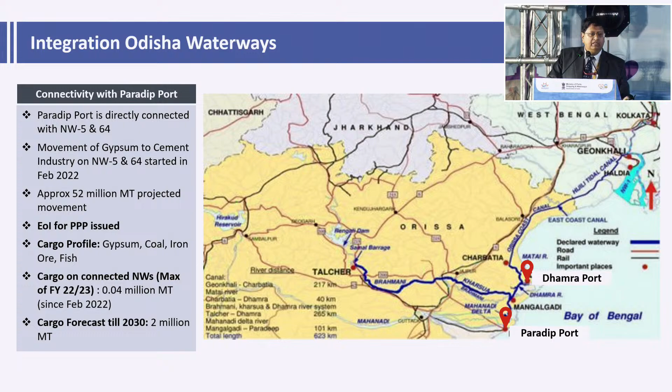And we are developing this project in PPP mode. The Cochin port is integrated with the waterways of Kerala, and we are trying to increase the cargo so that connectivity to the Cochin port gets maximum use of the cheapest mode of transport.

The new Mangalore port is also connected through waterways. The state of Karnataka has shown interest in connecting these waterways to the Mangalore port, and we are trying to develop this region.

Goa is connected through 3 waterways, Zuari and Mandovi, and a connecting waterway, which we are trying to develop for cargo as well as passenger transport and tourism.

The Maharashtra waterways give almost 50% of the cargo on the waterways. So the port of Mumbai and JNPT are connected through the river systems. Jaigarh port and other ports are also connected through the river system.

And we have taken up projects to develop this. Tenders for development of the Amba river and the Vashishti rivers are on. A few more will be invited and published soon for development.

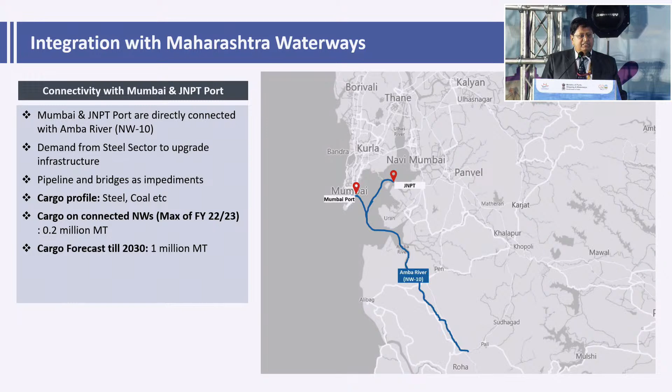There is another concept of connecting different ports through the coastal route, which otherwise, if we travel through land, takes 5 times the time and around 3-4 times the distance. So waterway is the cheapest mode, like Hazira and Ghoga, Mumbai and Ghoga.

Hazira-Ghoga is already connected through a ferry, and cargo of course goes there. But Mumbai-Hazira is also being planned through a Ro-Ro ferry.

So for the way forward, the government has taken several steps to promote coastal shipping and inland waterways. These are policy initiatives, the soft part of the policies, that is relaxing the licenses for coastal operations, promoting RoPax, Ro-Ro, giving priority berthing to coastal vessels and Ro-Ro, discounts for port charges, assistance in construction of coastal berths, and reduction of GST for bunkering.

So with this, I call upon the speakers to highlight their initiatives, and specifically Bangladesh has done good work in inland water transport and coastal shipping. May I request Mr. Khalid Mahmud Chowdhury, Honorable Minister of State, Independent Charge, Government of Bangladesh, to give his special address, please.

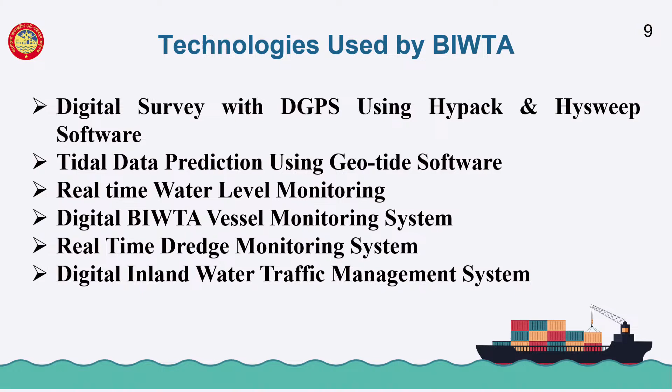And digital inland water traffic management system is in the pilot phasing. It will have many features included in it, like electronic ticketing, online registration, and the civil vessel tracking and monitoring system, etc.

Involvement of private stakeholders is very important to revive, and the diversification of cargo is also important. We are only handling a very limited number of cargo. Though our trade is very huge, we can diversify the cargoes.

Best business practices to be established, and we can also work to have common navigational facilities like AIS, so that the vessels plying in the IBP route have a common AIS system which they can use both in Bangladesh water and Indian water. Ladies and gentlemen, I am at the end of my presentation.

I just want to conclude saying that in terms of regional cooperation, there are very few countries in Asia which have such level of cooperation and integration using the river routes. I hope that it will continue on our path of success. Thank you, ladies and gentlemen, for patient hearing.

Thank you, Commodore Arif Mustafa.

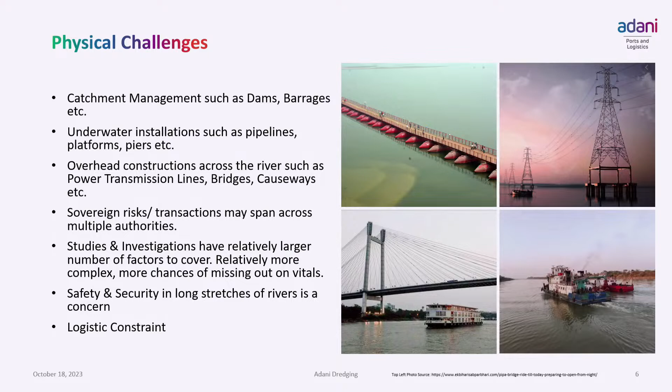The third and most important was the physical challenge, because there were frequent interferences - either underwater installations such as pipelines, or as you can see, the floating pontoon bridge overhanging. These are the physical challenges we faced, and we slowly learned how to meet and mitigate those things.

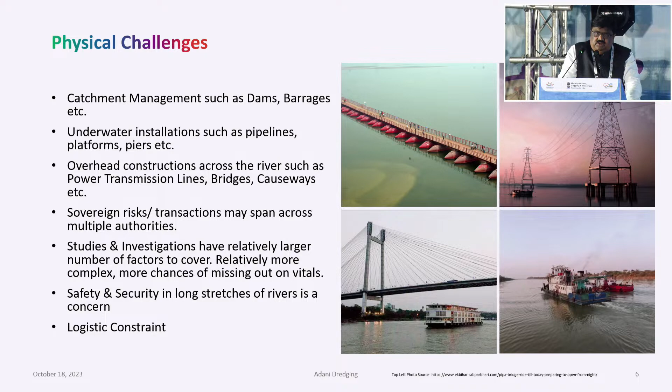How we approached it: we deployed cutter suction dredgers and water injection dredgers, and the real challenge was that constant surveys had to be done on a weekly basis to know the flow of water and how the morphology is behaving. We took all this into consideration and delivered what we had to.

Yeah, you can see that our first year was really challenging, especially during the lean season when we started, because there was a sudden drop in water level. So we tried to understand how we could mitigate that. We started using local support to understand from the locals the best way to streamline the river flow and achieve what we were looking for.

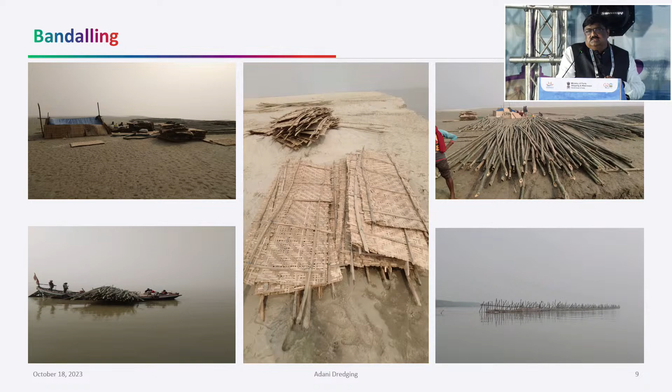Bandalling is one of the best options we found there. I think this is really streamlining the river and giving us the best results.

One of the things we did, when we entered there, was think about the best equipment we could deploy. We introduced some innovations like the extended pontoon and the angle of the cutter, to understand how we could deliver about 45-meter width and 3-meter depth throughout the year.

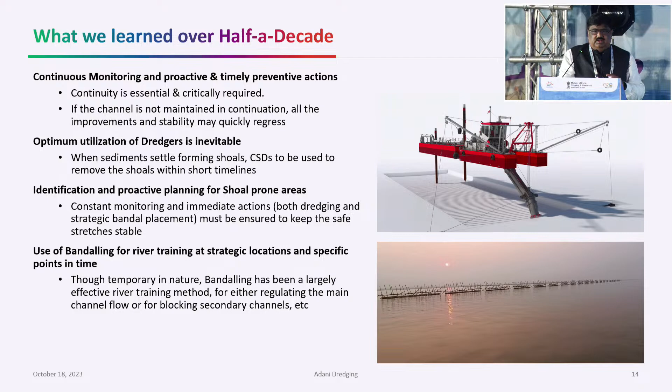Now just a few points on the sustainability of the waterway. We talked about the measures we have to take, constructing groins, dikes, etc., just to streamline the flow so that we can have minimum dredging to be done, and a long-term approach to be taken.

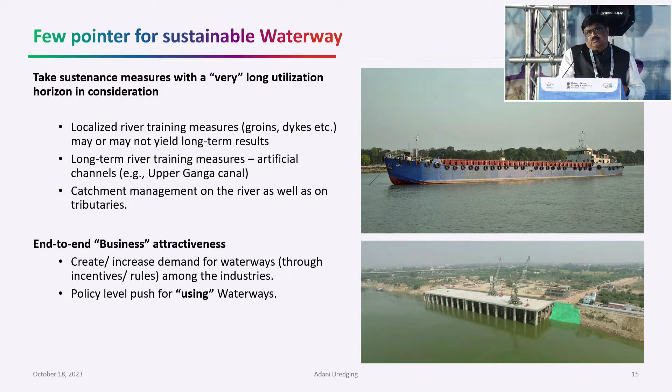And for the business side, as discussed in the presentation, we talked about using policy levels, giving some incentives so that more and more people can come and do their business in the waterways.

So in a nutshell, we have to work with the rivers, not against them. That's the way we are doing it there. Thank you, thank you very much.

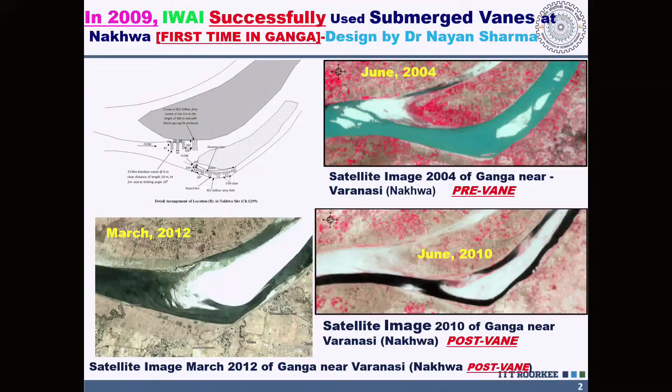Well, in 2009, for the first time, IWAI applied this submerged vane technique. Submerged vane is also dredging, but there is a difference. In mechanical dredging, suction cutter dredging, the river is forced and the sediment gets redeposited. Not only that, the ecosystem, mainly the food chain and habitat, are destroyed. That's a fact. Whereas in submerged vane, we try to induce the river to do dredging spontaneously.

So our experience since 2009, which I visited only two years back, shows that without any dredging, without any bandalling, the water depth is maintained. Prior to this, the water depth was only 1.3 meters, and when we visited two years back, we could still get 3 meters plus.

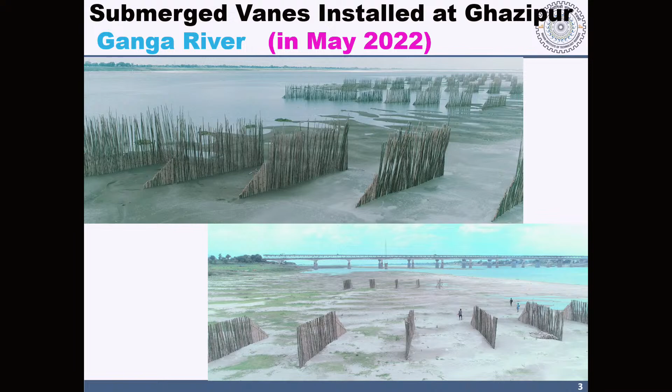Since 2010, almost 12 years, there were some reasons IWAI didn't pursue this very promising technique. But I must give credit to the present chairman. After he came on the scene two years back, the matter got reopened, and for the second time, IIT Roorkee got a chance to use this technique.

In the United States, they use steel plates as submerged vanes, and also concrete slabs. In Europe, they use mostly steel plate and concrete slab. But it's unaffordable because Indian rivers are not like the Mississippi or the Rhine. Ganga, Brahmaputra, Gandak, Kosi are very tough rivers.

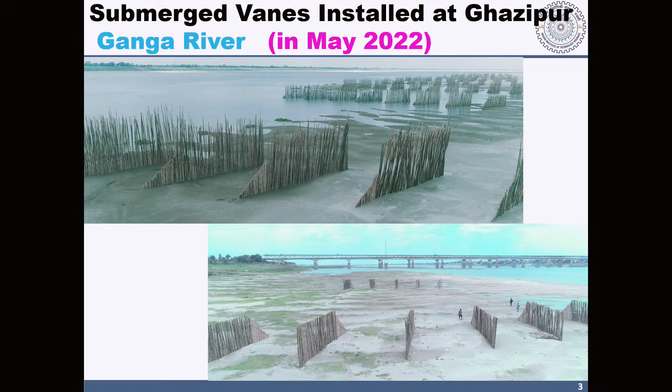Even though I worked on this quite a long time, I was in two minds whether it would succeed or not. But we are very fortunate, we applied the submerged vane technique at 7 sites. The one you are looking at is from last year at Ghazipur. This was during installation. We should try to evaluate what the results are.

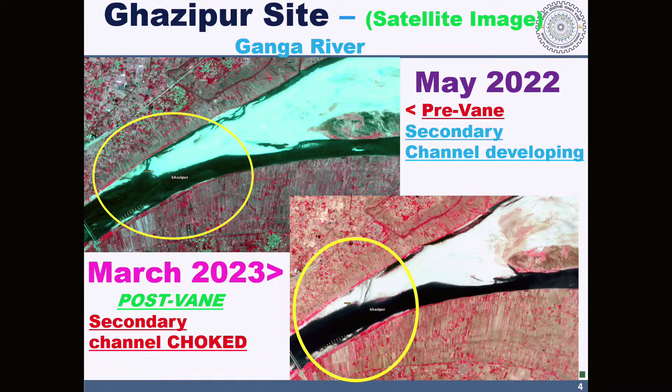In 2023, the lower satellite image shows that this secondary channel was closed, it was choked. That shows it worked well. We also checked with a cross-section survey conducted by IWAI. Please look at the red line, it shows a perceptible increase in water depth. This is really happening.

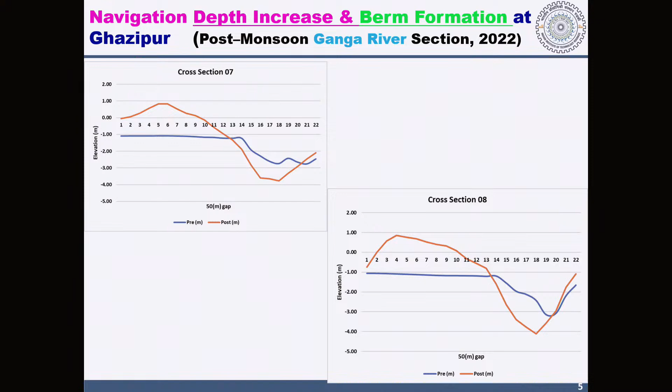If you do dredging, you have to spend 200 to 300 crore rupees. This total cost was only 9 crore, so it's highly cost effective. Because of shortness of time, I will show you only 2 more sites.

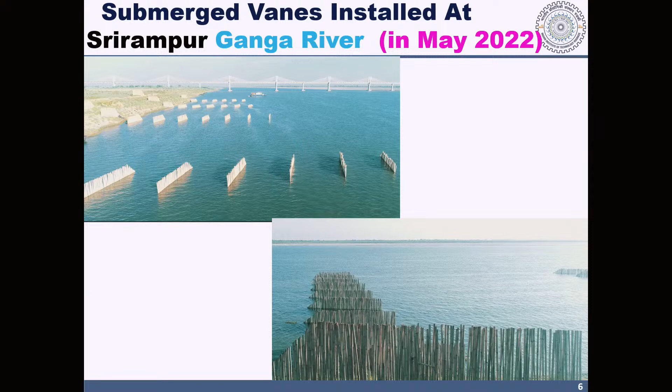This is another site done last year, Srirampur. You can see the submerged vanes being installed during low flow in the month of May. This one uses bamboo to cut down cost. Please have a close look at this satellite image.

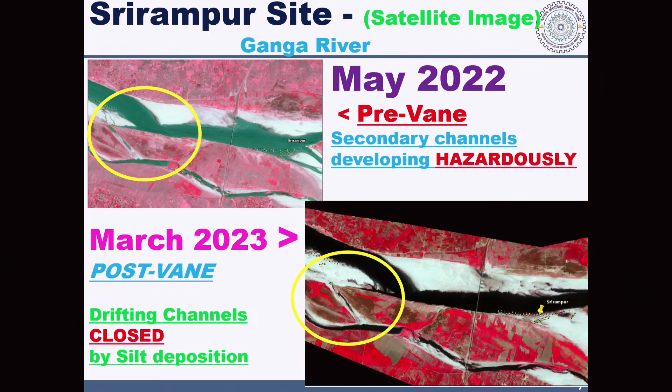3 meters depth or more means you can carry cargo as big as 2,000 tons or more. So this is very clear, recent evidence that using submerged vane, we could achieve what mechanical dredging is achieving.

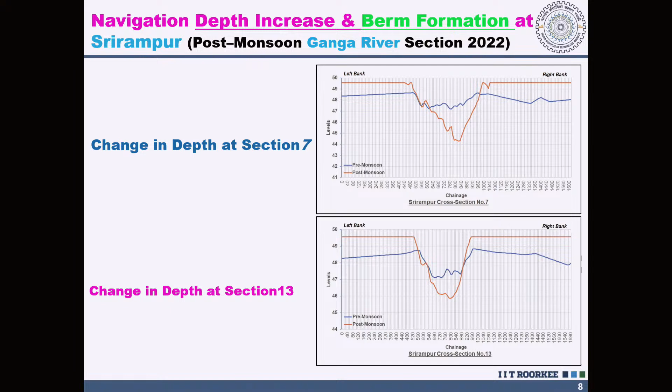This next one is very interesting, probably my most challenging case. The upper image clearly depicts that river Ganga at a site called Srirampur was trying to completely change course — that's why I wrote 'secondary channels developing hazardously.' A river like Ganga or Brahmaputra, if it changes course, it is tremendous, it can be disaster. Like in 2008, the Kosi River changed course in Nepal, and almost 3 to 4 million people became homeless.

I was worried, but I'm really so happy to show you the lower image. Please see very carefully, that almost 2 kilometer wide river has gotten silted up. It's real, satellite-based evidence, the latest one. That means the submerged vane has done wonders with a small investment. It's very low cost, it's very eco-friendly — because we don't destroy the natural habitat of fauna, planktons are not disturbed, and the megafauna's food chain is retained. Still I'm able to achieve this with minimum cost.

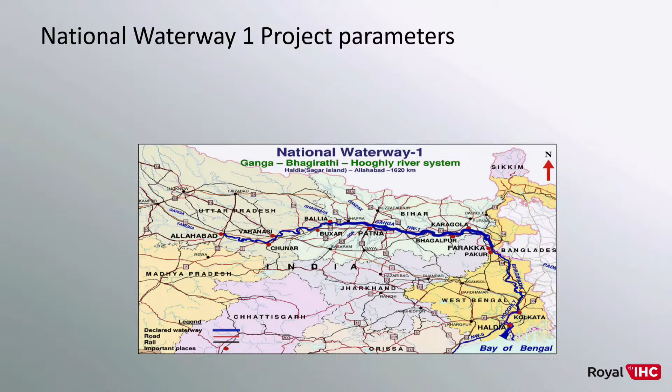I will have a little bit more of a technical presentation today. I get 5 minutes to explain why customizing dredging equipment for your project is very important. I want to take the opportunity to use National Waterway 1 as an example, which was also mentioned earlier by our dear customer Adani's.

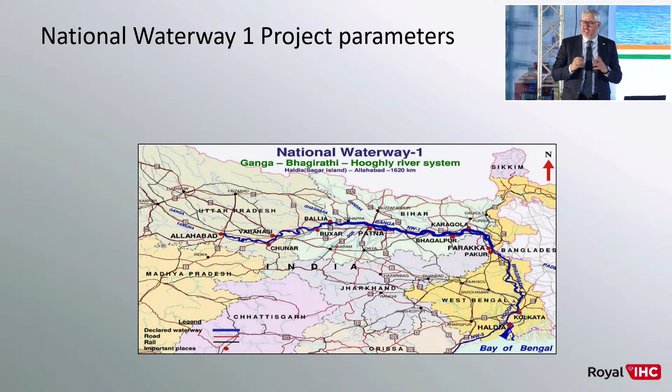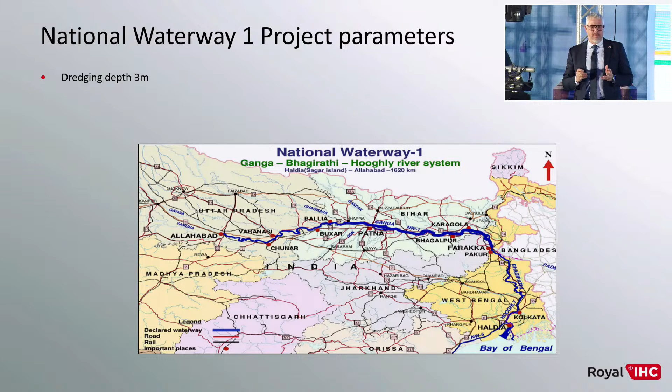In this National Waterway 1, there are a few specific project-related items. For example, the dredging depth needed, as mentioned before, is a maximum of 3 meters. The canal dimensions in width are 45 meters maximum. And of course, what is also important when you dredge canals, rivers or ports is the soil type. If you take these parameters into account, then it's very important to look at your specific dredging equipment.

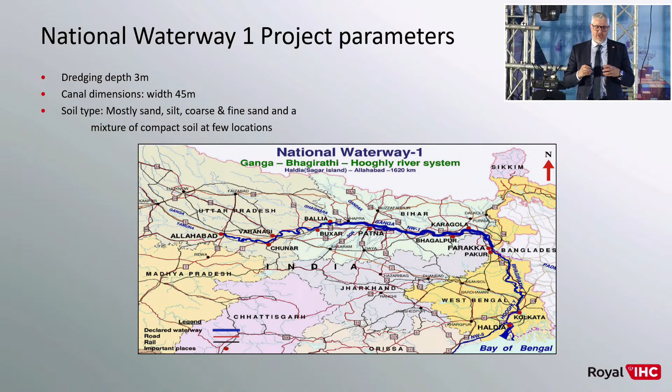In dredging equipment, you can basically go in 2 directions, depending on the size. One, you can go to extreme bespoke equipment, fully tailor-made for your job.

A fully tailor-made project is usually quite costly. On the other hand, you can go from the standardized cutter suction dredger series and modify these to your specific project. Usually this is the most cost-effective way of approaching your project.

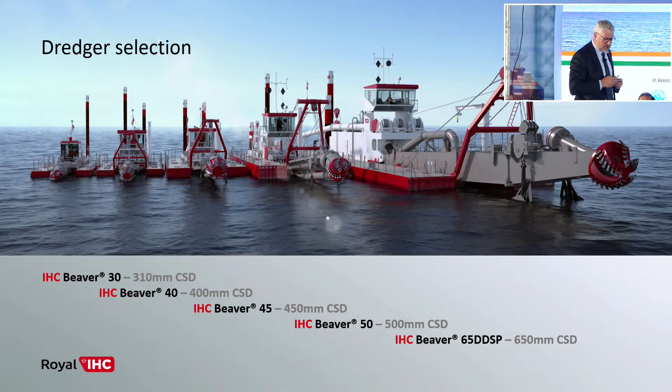In this particular lineup, we have cutter suction dredges of 31, 40, 45, 50 and 65 centimeters of dredging diameter.

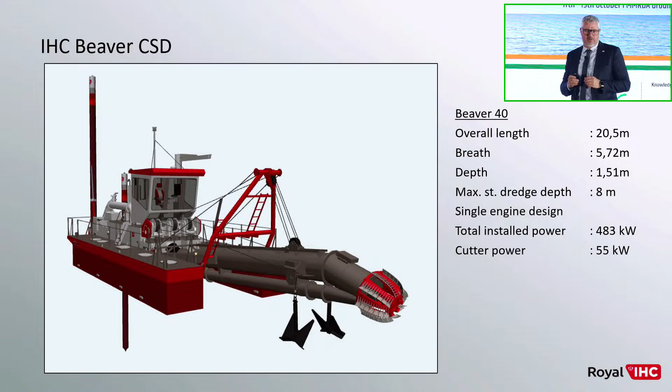In this case, we found out that the Beaver 40 was the most suitable unit for dredging in the Ganga, with a cutter power of 55 kilowatts. It's not the biggest one, but suitable for the job. The maximum dredging depth of this Beaver is 8 meters, so it's far off from the 3 meters required in the Ganga. I'll come back to that a little later.

Another important item for your cutter suction dredger is what type of soil you have and what kind of cutter head is most productive. In this case we opted for the Lancelot cutter head, which cuts in thin layers, has 8 cutting pieces, less blockage, less vibrations. This is one of the choices possible in dredging equipment. If you go to more coarse or harder sand, you may need a different cutter.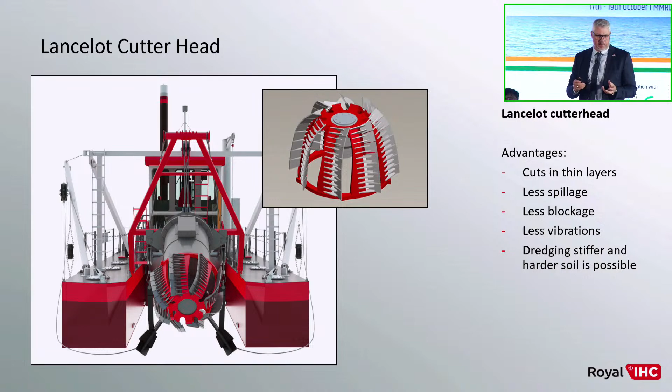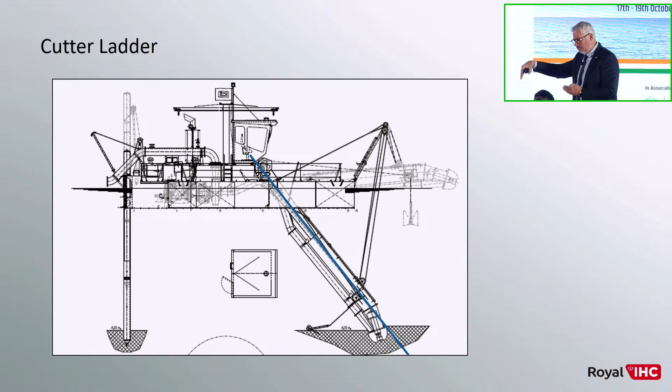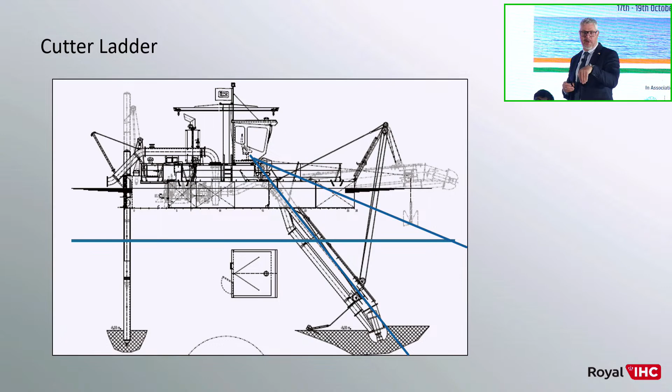Coming back to the cutter ladder and the depth: this is the standard configuration, dredging at 8 meters maximum water depth. You can see the angle of the cutter head at the seabed is at a certain, most optimum cutting angle. If you have a maximum depth of 3 meters, the angle of the cutter ladder will be completely different, meaning the cutter head will have a different, less efficient angle of approach to the seabed.

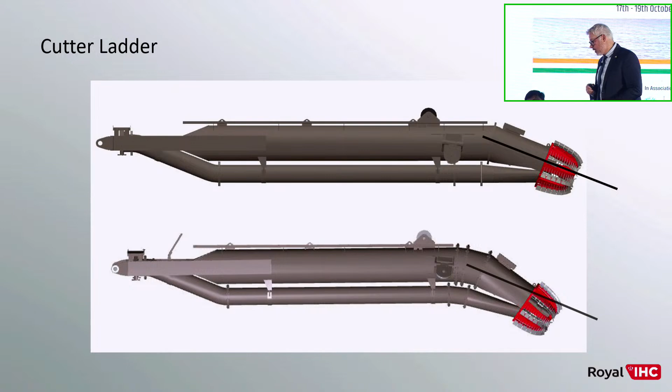To compensate for that, this is the standard cutter ladder and the angle of the standard cutter head. This is the modified cutter ladder, and you can clearly see the angle of approach has been modified to adapt to the 3 meter maximum water depth of dredging. All to make your dredger more productive.

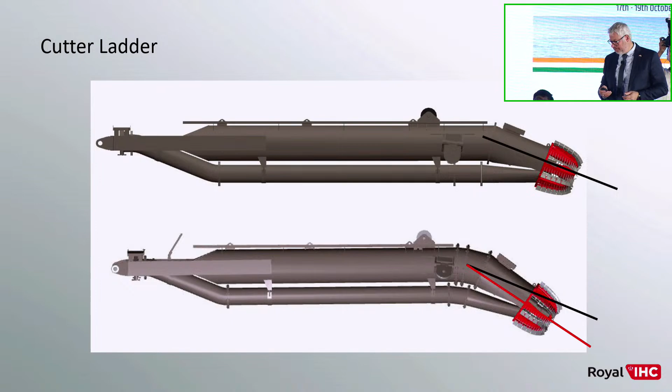Another thing: the heart of the dredger is very often the pump, and we design our pumps ourselves, testing extensively in our lab for certain soil types. One critical item on the pump is the spherical passage - the larger it is, the larger pieces of rock, pebbles, etc. can pass through your pump. If your pump gets blocked, you need to open and clean it, so a larger passage gains efficiency and operational time.

Also, all our pumps are made of extremely hard, wear-resistant material, because we know soil dredging is very aggressive. So we want as little wear as possible - of course you will always have wear, but we try to reduce it as much as possible.

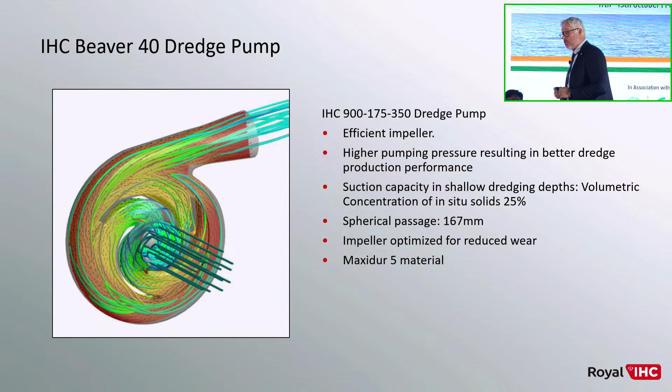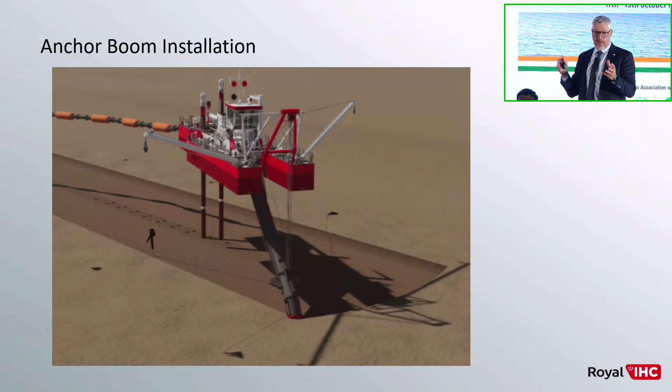Then there's the spud carriage pontoon. The cutter suction dredger is connected with a spud to the bottom and pivots along the spud - you do one cutting, step forward, do the next. You can increase that cutting speed or forward movement by means of the spud carriage pontoon. In this case it is extremely long, 12 meters extended from the normal spud carriage pontoon, because we want to achieve a 45-meter canal swing in one go.

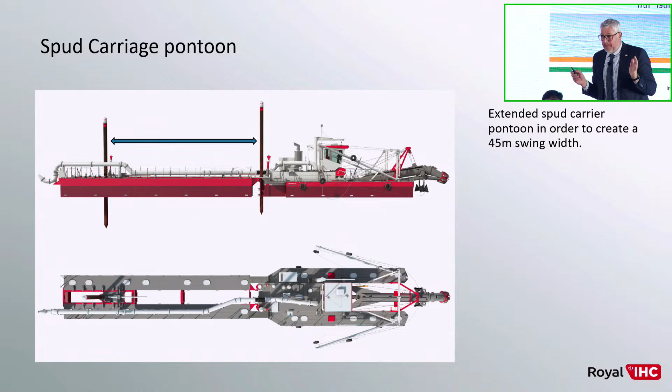And of course, this is all technical matters for your project - for different market segments we have different fleet families and different solutions.

We have to realize that when we invest now in a vessel, 20 years from now it will still be in operation, so it would be a pity to invest in conventional technologies. A no-regret solution is, for example, a modular system where you choose an electric drive line and a more conventional power system in a separate module, so you can change the module in future when a better solution is available. You can also look at the vessel design, which we think can be optimized for the future and its use.

Give you one example - a lot of vessels, I don't know how it is in India, but in the Rhine system, a lot of vessels are over-dimensioned in engine power. That leads to higher energy use than what would be required for that type of operation.

Greening is a difficulty when there is no business case, or when it's not made mandatory by regulation. What we see in the Rhine system is a more voluntary system growing, where shippers and cargo owners are taking initiatives, where green deals are being made, where emission labels are being set up, also initiated by the maritime industry itself.